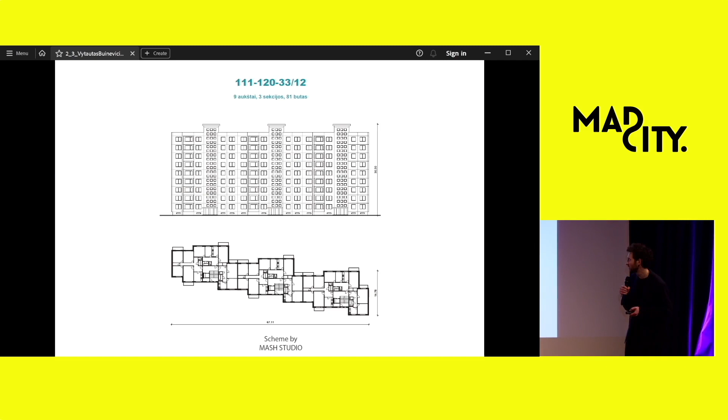So this is, everybody showed today where they come from. This is the view from my window for 12 years when I was at school. And that was before I got to know that it has a name: 111-120-33/12.

Later on, I went to study in the Netherlands, in Delft, where I did my master thesis on my hometown and my home neighborhood, trying to do something quite edgy from the perspective of the inhabitant. So it's about how to densify the neighborhood and do that at maximum capacity while still keeping it reasonable, and bringing in new typologies, new functions, and new urban structure.

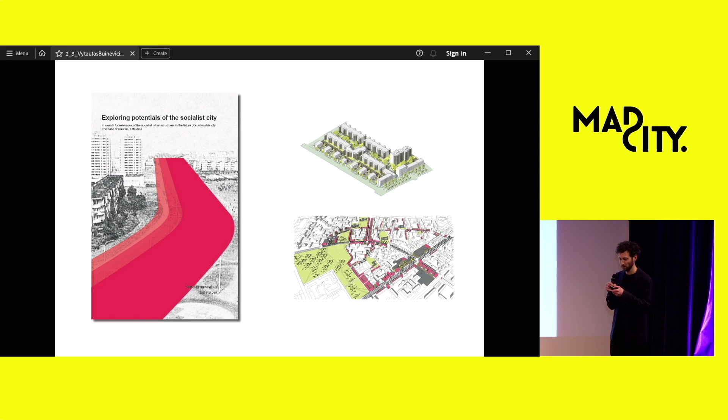Later on, I came back and worked also with local communities, and learned that it's not that easy to do even simple things.

So today we collaborate with an NGO established by Vilnius municipality, and the task is actually more architectural: how to make the renovation kind of nice, you know, since architecture has been forgotten for so many years. It was all about focus on energy efficiency, facade insulation, and so on. But the architectural community was never really involved.

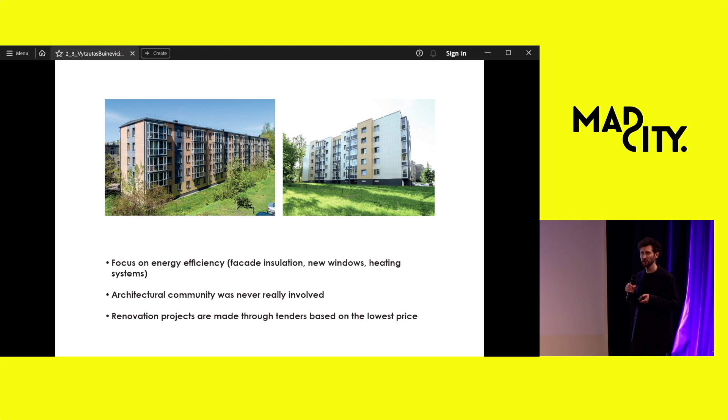And renovation projects are usually made through tenders where the main criteria is the lowest price. And then somehow not the most motivated people sometimes do the projects.

So we talked together with our client about long-term versus short-term. In the long term, we can do a lot: a new tender system, more flexible financial tools, because now financial tools are mainly for reparation, like repairing buildings, not really transforming them. We want to enable building transformation with high quality design projects. Maybe there should be some typical projects, at least some good ones.

But now we have to do something because we have high numbers. The communities have been convinced, but now we have to do something within a few months, basically, to improve the architecture, the quality of architecture.

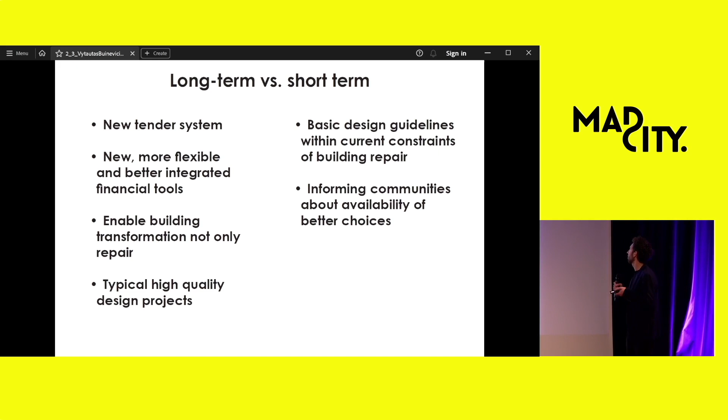And that's where we're thinking about design guidelines and what we can do in the short term.

So the renovation procedure, maybe in short: the community is informed, then they vote. Then there's an investment plan, which is basically a bunch of lines and figures saying, okay, we're going to renovate the facade, we're going to insulate that, but no architectural design criteria is in there, and people are kind of blindly choosing what's going to happen with their building.

So then there's a tender for design and a tender for contractors. We thought that this is the moment where we can actually enter with design guidelines.

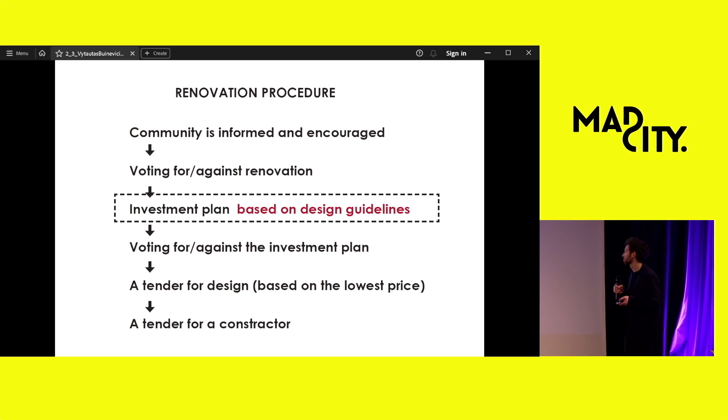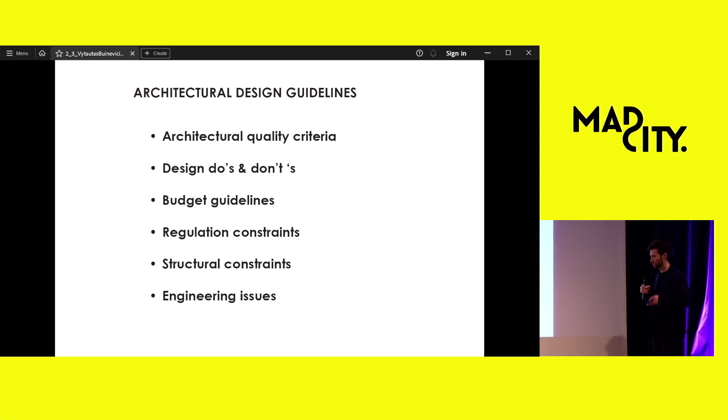These should be architectural quality criteria, design do's and don'ts, all related to budget, regulation, structural constraints, and engineering issues, because all of that makes an impact on architecture.

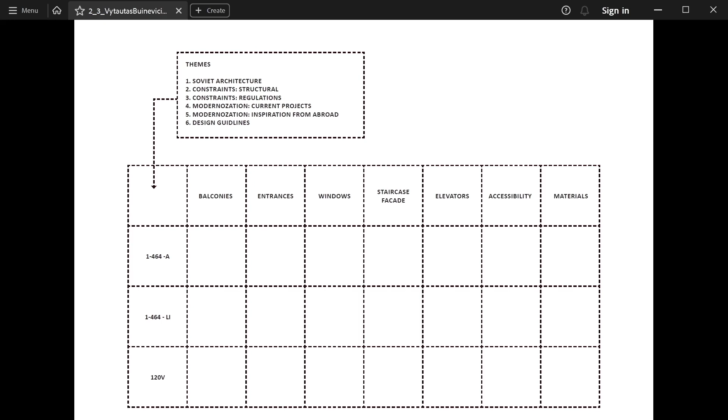So we came up with this matrix for research. We go through the themes, we go through the history, we go through constraints, and on the left side we have the main, most popular types, typical projects, and then the main architectural tools we can put to use while still not going into full transformation of the building, but keeping it in renovation, repair mode.

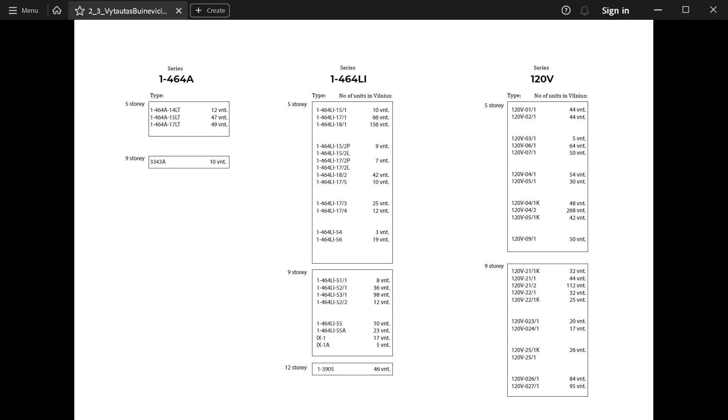Once we had to decide the applicability of the design guidelines across the whole spectrum of typologies, we did some studies starting from the most popular ones, and then seeing what's actually the DNA of that kind of typical project.

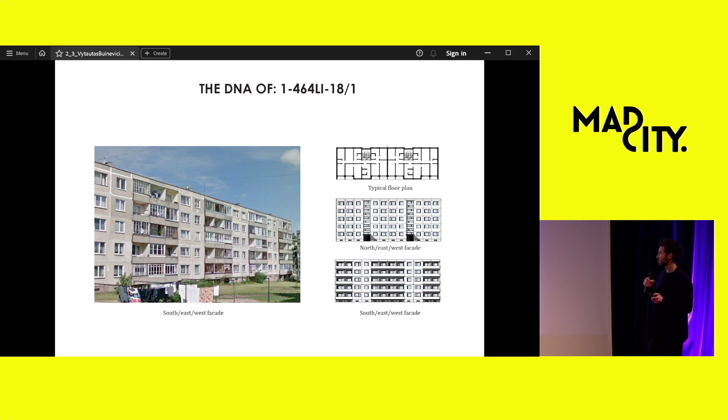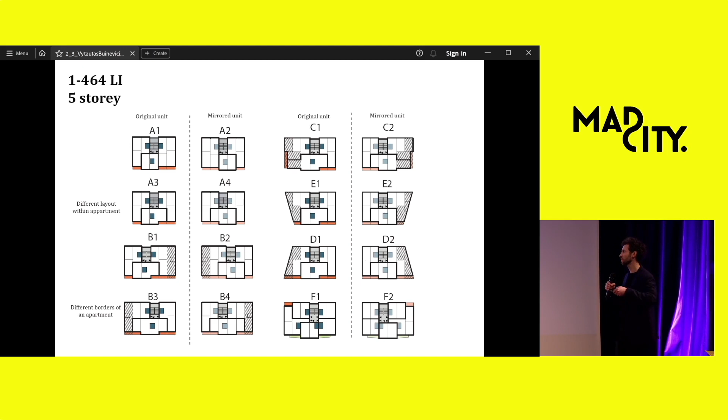This is one of the most popular. So then we go through the typical unit, which is repeated in different ways to make the actual building. There are mirror versions, slight modifications, and well, that's quite a lot actually. And then you see how they are combined. It's really like a DNA kind of thing.

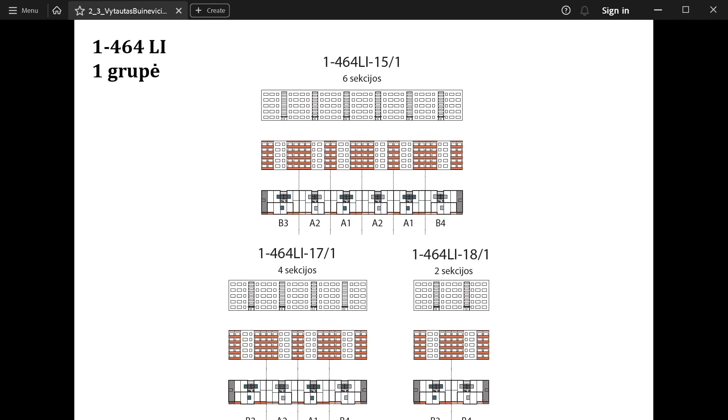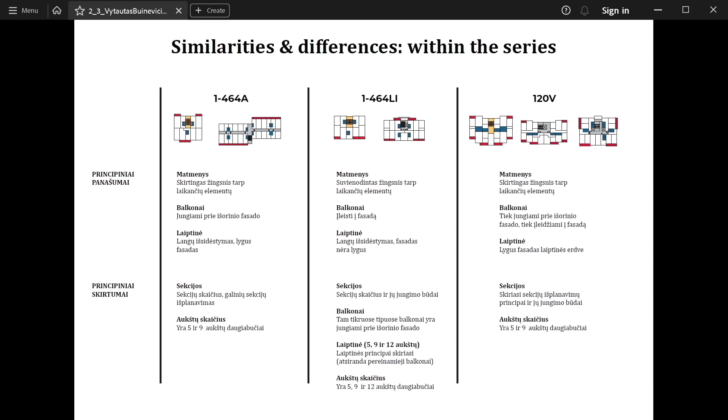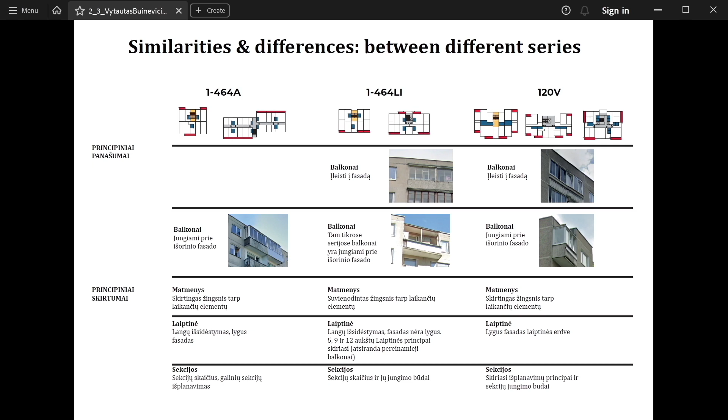So we try to group them, trying to see the similarities and differences between different series and also between different types. Of course, the buildings look alike, but once you actually try to understand them, they're very diverse.

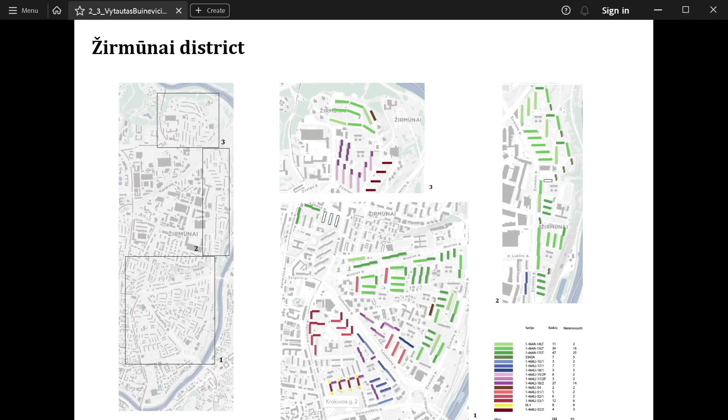And okay, what to do with this scope? This immense amount of material to process in a short time. So we came back to our client and said, what should we do? And then we decided to focus on the neighborhoods which are, for now, best suited for renovation - the people who are really willing to renovate. Maybe let's focus on those types of buildings in those areas.

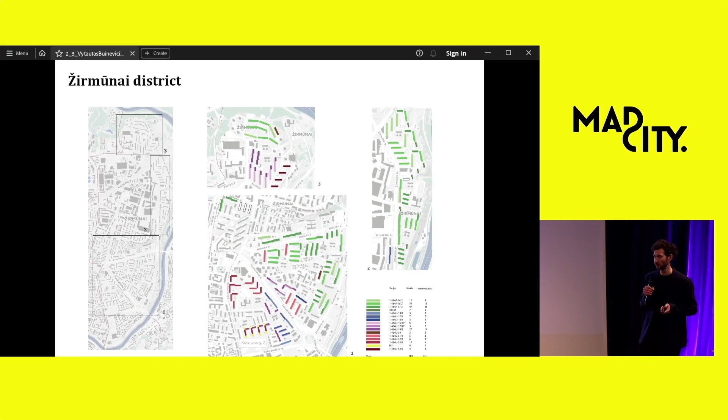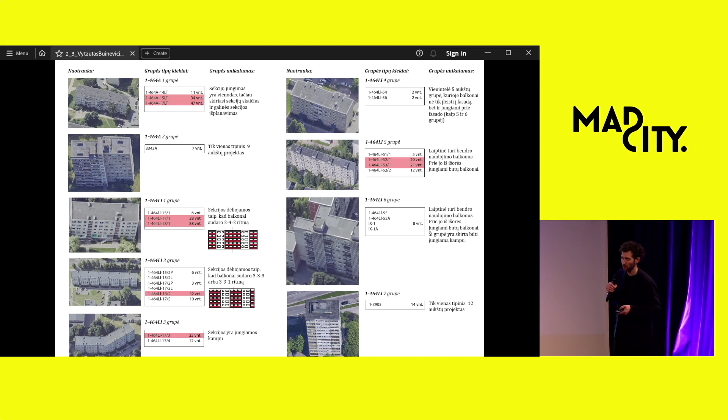So then we did that scan and really saw the figures, which are the types that are most popular, and then we stuck to the three main types. So then we've got our types more clear and more focused.

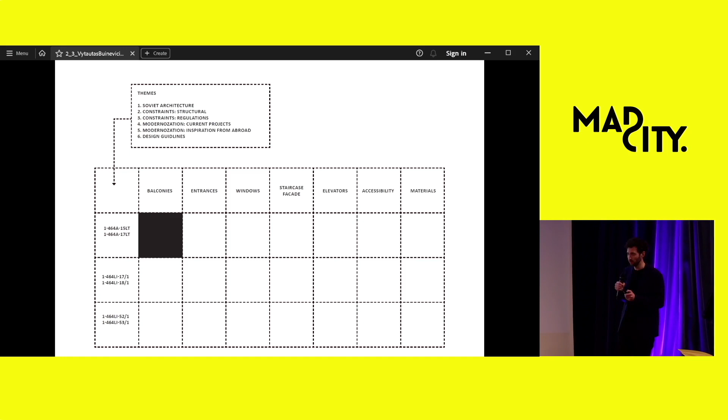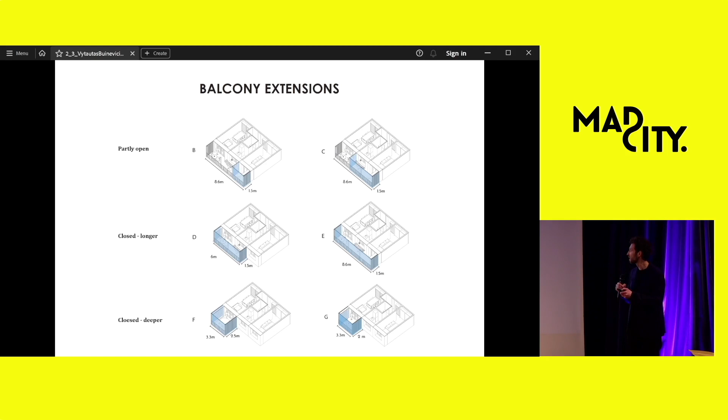Okay, one of the key tools we can apply are the balconies, for example. So we start with balconies. We know from amazing examples that balconies can make huge transformations, but not all of it is really applicable at the moment with all those regulations and financial means we have. So we look at what kind of balconies in general could be made.

When we see the history of balconies, we see that new buildings have open balconies, but over time people tend to make them closed. So maybe we should think about that. And the distribution of balconies - can we just spread them with a free hand of an architect, saying you're not going to have a balcony, but you will? So it's quite a difficult task. This is just some of the studies we did about balconies.

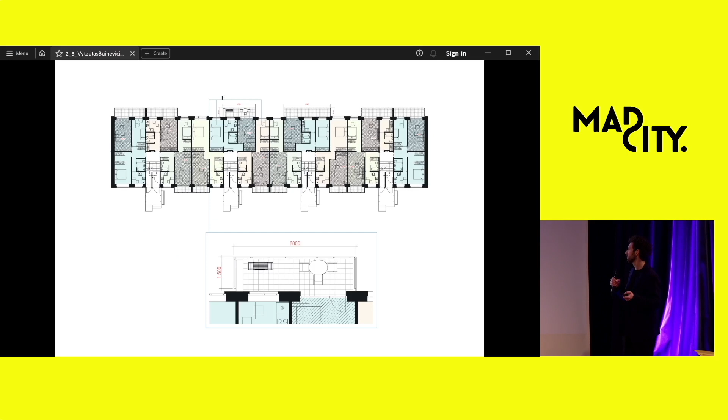And apart from the balconies, we also have frames and railings. These are some of the best offers we have, but how can people choose from them? We somehow need to help them. Windows - they can make a huge change for the building.

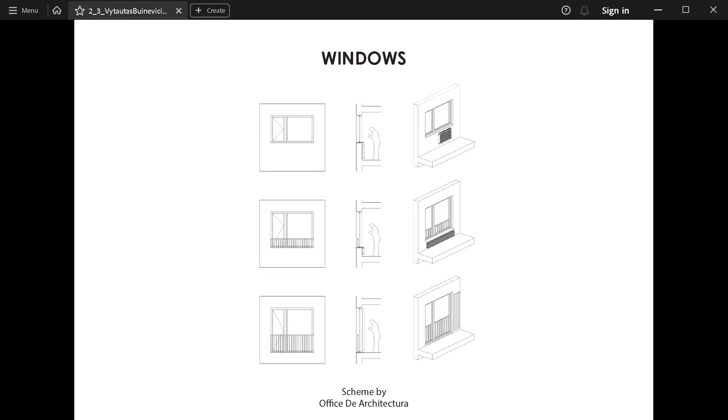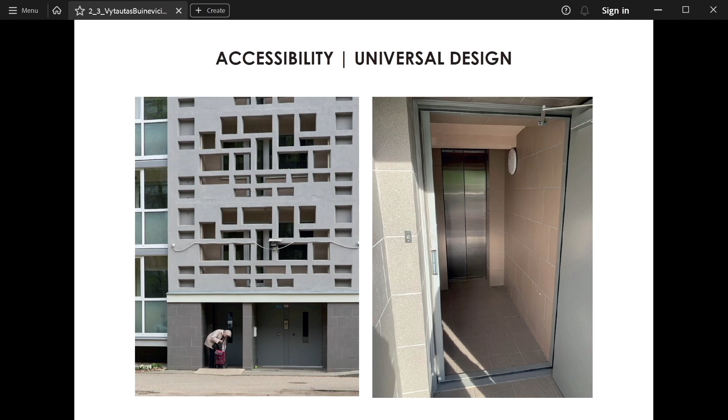The use of colors and materials - are the happy buildings the ones which have the most colors and materials? Very important. I know only one 9-story building in Vilnius which has done that. And if you have this opportunity to do that, please do.

It's turning the trash room, where all the trash would land, into an access for the elevator on the ground floor. It's very important - we should make it a standard.

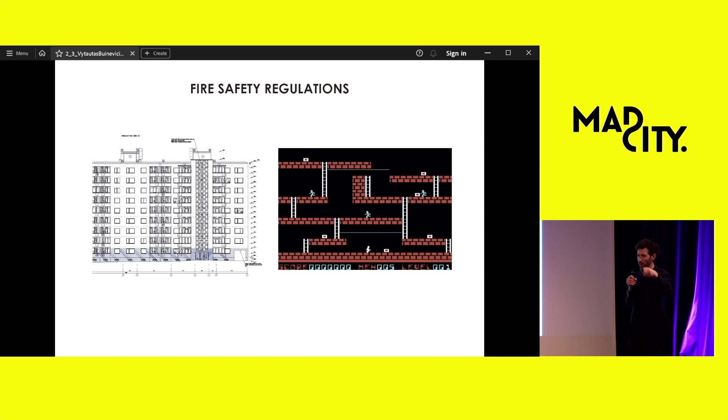Fire safety regulations is when we see which are still kind of theoretically working fire regulations for that building. It's basically a Lode Runner game - if you've ever played that, you jump through the balcony, go through your neighbor's balcony, go down, and somehow you escape fire.

So we also thought, okay, we have to come up with design guidelines, but unless we design it ourselves, how can we tell someone how to do that? So we ran different combinations of colors, elements, and designs.

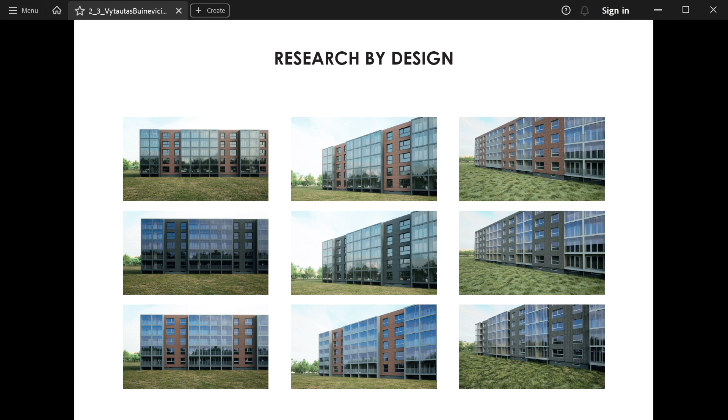Sometimes maybe we can use even just a window enlargement to make it already look like a different building, or maybe we can just do something with the balconies and so on. So this is a working draft now, of 9 architectural criteria.

So first is a new image - somehow it has to look different. Integration in the urban setting - we know all about that. Improving functionality - sometimes there aren't many tools we can apply, but more light, extra space in a balcony, for example. Rationality, no-nonsense design.

Long-lasting, so high-quality designs, technologies, and materials. There are budgets for that, but people somehow lack the knowledge that they can use better materials. Architectural integrity - many elements, one language. Materials and colors - less is more. Universal design - so we should do that as best as we can with the tools we have at the moment.

And of course, the best of all is that the best is what is best for all. So it's about community, empowering the community to make choices and direct their renovation, not so blindly, but actually towards what they really want.